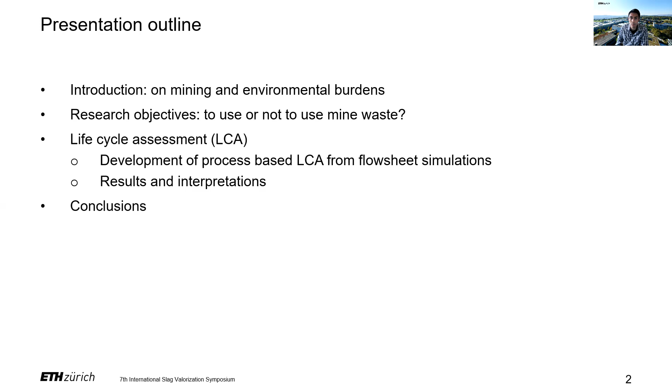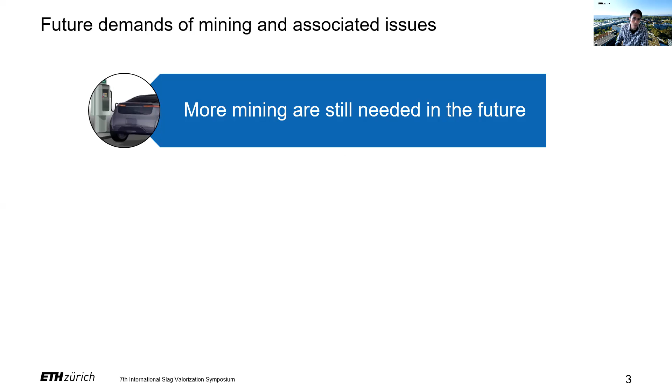So as much as we love renewable energies, EVs, electric vehicles, and also all other technologies for the low carbon transitions, we also need to understand that they have one thing in common, which is material and metal. So of course, we need to mine more of those materials from nature. But when we're processing this mining, we also produce at the same time waste.

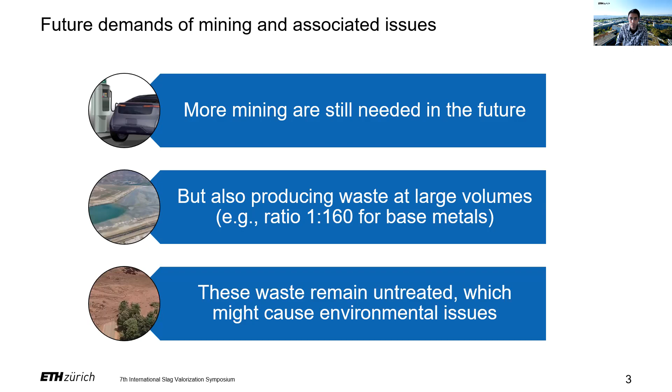So the ratio could be as high as 1 kilogram is equivalent to 160 kilograms of waste being landfilled. And if we are not careful in managing those wastes, we might face environmental issues in the future. Some researchers, such as Edraki et al., have suggested some ideas to decrease these environmental pollutions, such as desulfurization. So imagine that we are able to decrease the sulfur content, so there might be less acid mine drainage.

At the same time, there are also other propositions by Lottermosser He suggests that basically some of these residues also contain minerals that can be used for the production of construction materials. So we know that this is useful to decrease the mine waste volume as well as the opportunity to increase the economic value.

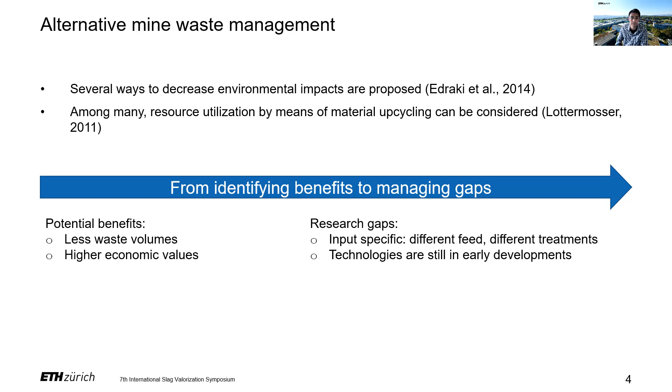But we also need to realize the challenges. For instance, these mine wastes have different characteristics, so there might be different recycling options. And most of the time, they are still developed in the lab. So we cannot just say they are viable or feasible. That's how we come up with the research question. So the most important thing would be, how can we determine whether this process is sustainable or not? How do we measure it?

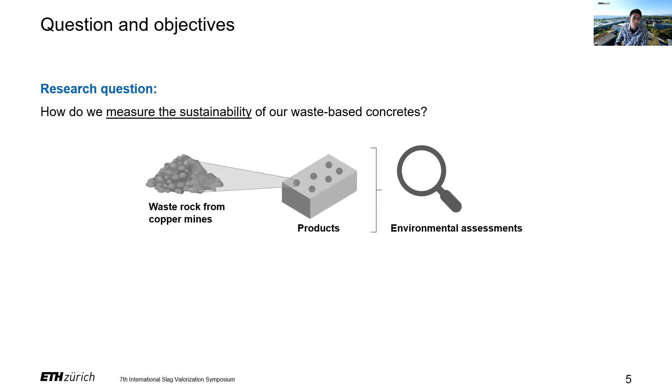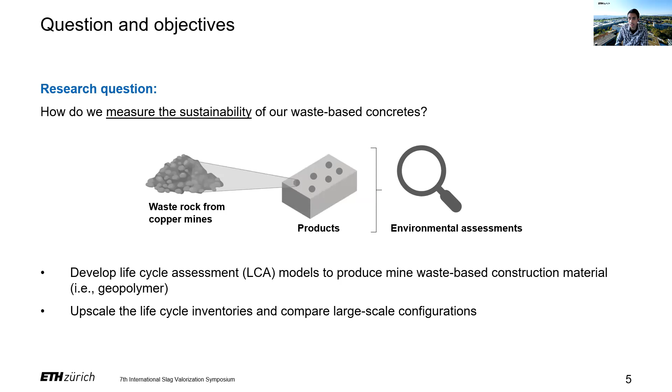So this is just an illustration. We obtained the waste rock sample from our partner from the copper mine sites, basically. And then the question is how we can conduct the environmental assessment. And the main principal method is called life cycle assessment. So we develop models for this life cycle assessment. I'll come back to that quickly later on. And at the same time, since we are dealing with new technologies, we have to think about how we can scale up these new processes.

For those of you who aren't very familiar with life cycle assessment, or LCA, it's actually a standardized method to measure or quantify all the input material flows, as well as the output flows to the environment. So we characterize them as emissions. So imagine at the beginning, we have the raw material or the mine waste, and then we do some treatments like heating, and then we introduce electricity, and then we also emit some wastewater in the entire value chain.

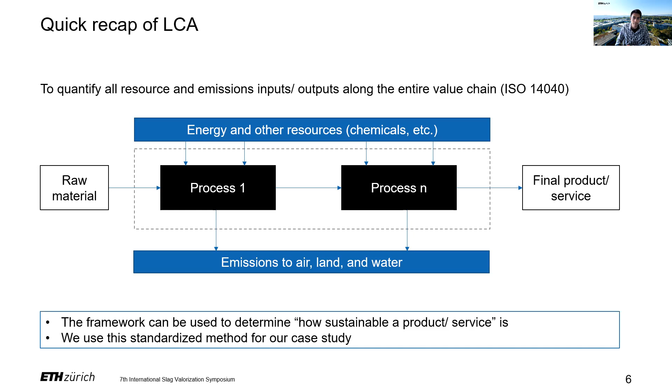So we need to know what kind of processes are involved and also what kind of inputs and outputs are discharged to the environment. So this is a method that can determine whether a product is sustainable or not. And this will be the main method that we use in our study.

Coming back to geopolymer. Davidovits extensively studied geopolymer materials for almost 2 or 3 decades. It's a synthesis of alkaline solution with aluminosilicate powder. So as long as we have these materials, we are able to produce geopolymer. In our case, we pick sodium hydroxide and sodium silicate as our alkaline solution or alkali activator solutions.

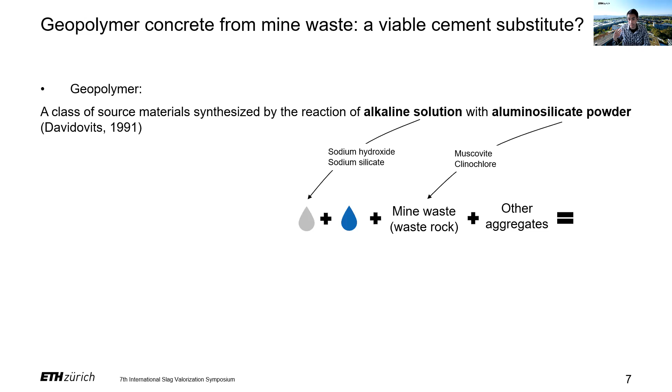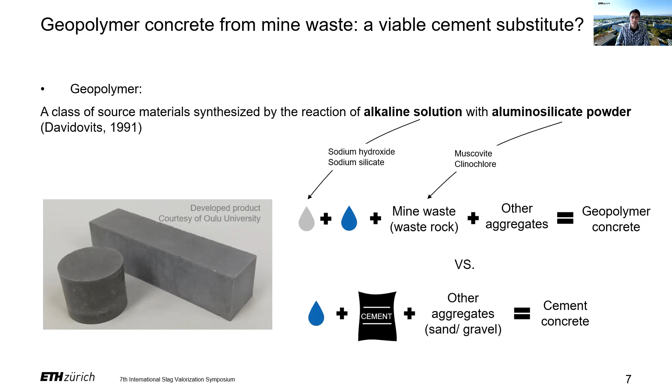We also obtain the mine waste rock, which already naturally contains muscovite and clinochlore, which are rich in silicate and also aluminum fractions. And we also need additional water as well as aggregates to strengthen our material to produce geopolymer concrete in the end. This is just an example that our counterpart has produced in their lab. And we eventually want to compare this with the ordinary Portland cement concrete, depicted here at the bottom.

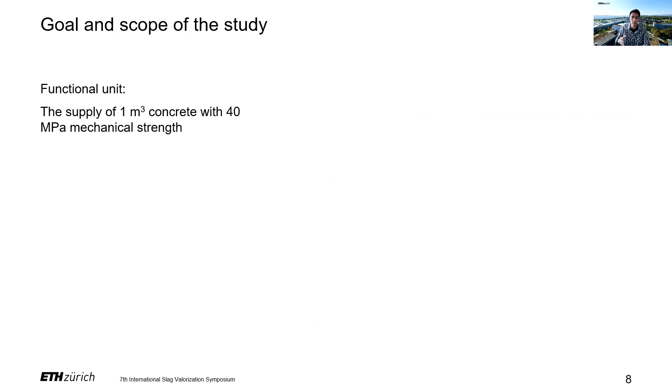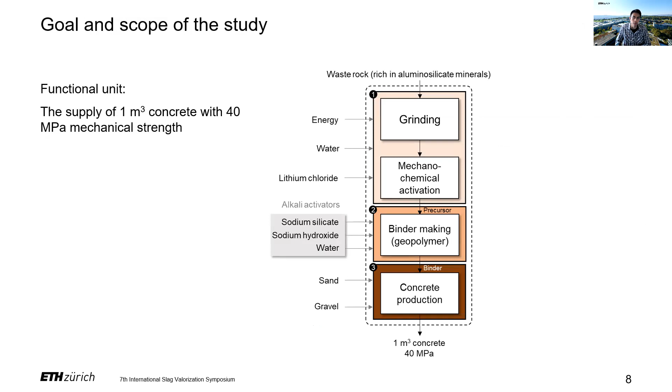We define our goal as the production of 1 cubic meter of concrete with the specified mechanical strength. This is very important in LCA because we want to compare equivalent systems. And based on our investigations, these will be the steps necessary to produce geopolymer concrete. These are also the foundation of our life cycle inventory data.

So we have the grinding in the form of disc milling at lab scale, and later on we add chemicals, and lastly we cure the concrete itself by casting it in this specific equipment, and then we produce concrete with a specific mechanical strength. We also rely on secondary data to fill the data gaps, for instance, from one of the most extensive recent review papers about geopolymer concrete.

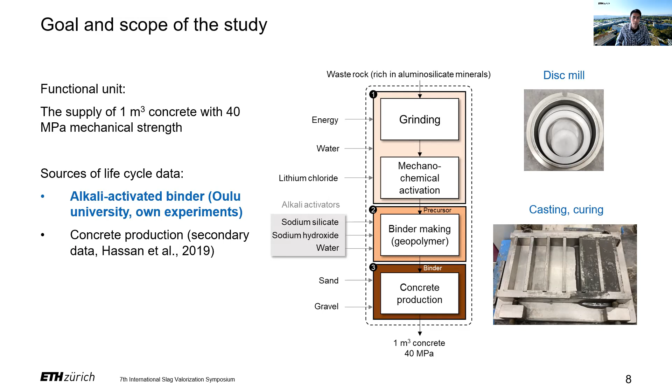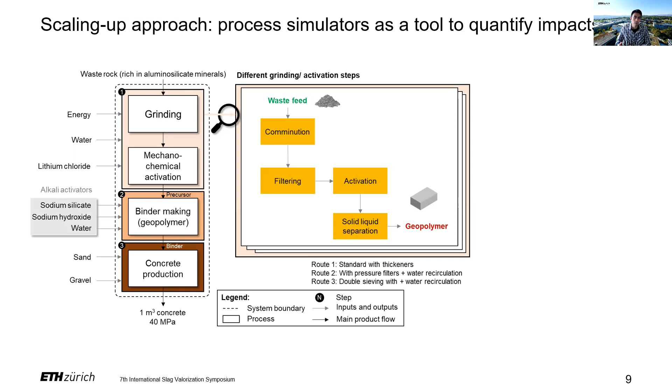However, when we are trying to scale up these processes, of course, they might behave differently. I mean, the equipment would entirely change. And even when we think about one simple step or lab protocol in our lab, it involves some complexity. That's why we need to understand how we involve these complexities in our modeling.

And one of the suggestions would be to develop life cycle assessment models using a process simulator or process modeling tool, such as those suggested by Reuter et al. So the main input data would be the feed characteristics, as well as the unit equipment process parameters that we define for each process or for each block, the yellow blocks shown here on the slide.

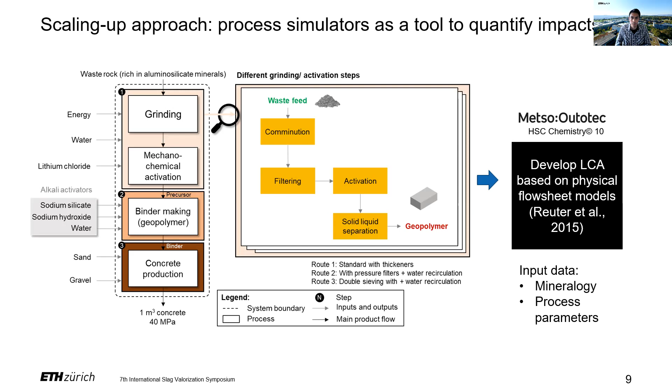I'll give you an overview of what kind of configurations are possible in the large scale for our geopolymer making. In the beginning, we have the waste rock feed here, and then we're trying to separate the inert materials from the non-activated materials. In here, we are trying to activate the materials using a high-intensity grinding mill. And lastly, we try to separate the wastewater or tails from the final products. Important to note here is the presence of thickener and mixer, because they are basically separating the products, as I said before.

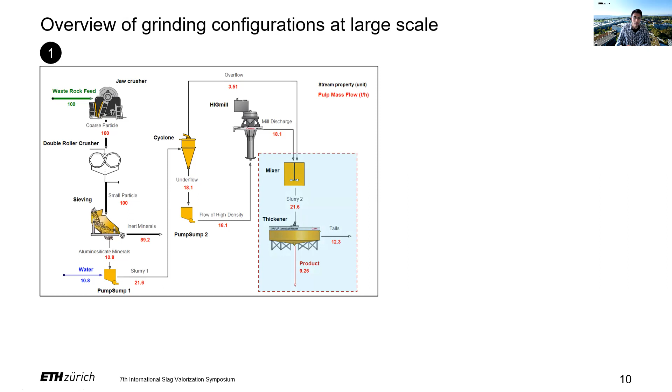In the second step, we are trying to think about how we can save water consumption. So instead of using a thickener, we are installing a pressure filter plus the equipment to separate the wastewater from the amount of water that we can recycle. By doing so, we are able to reduce the amount of freshwater intake in our process. But also, as a drawback, we need additional equipment or additional pumps. So that is associated with extra energy involved.

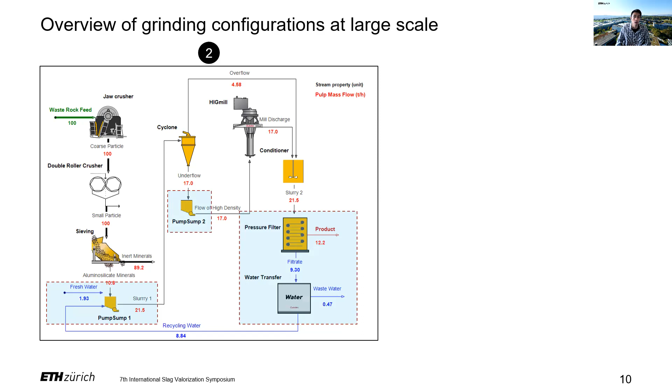We can actually optimize it even further, similar to the second process. Instead of using only one sieve, we can add an additional sieve, so that in addition to saving water, we can also decrease the effort to pump the entire materials. So we are still able to decrease the water consumption, and we are still able to produce the amount of product similar to the second method or second model.

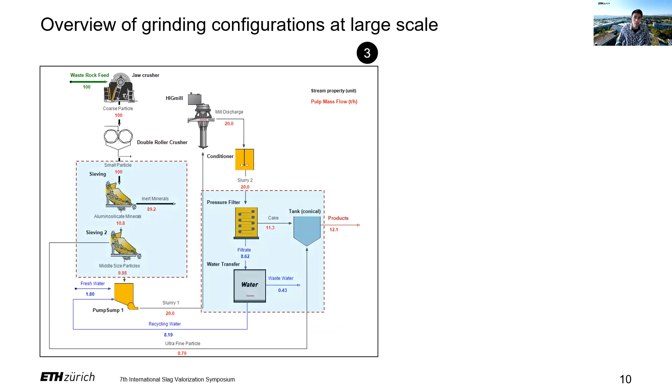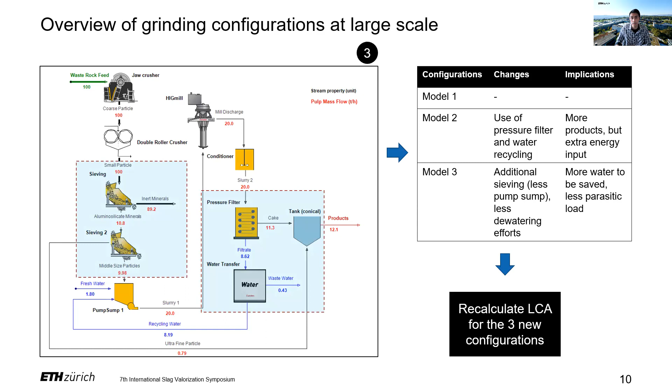So this will be the summary of changes and also the implications of changing the flow sheets in between models. And we resimulate the LCA for these large scale models, because eventually we will also compare this with a lab scale LCA. When we compare this with the lab scale LCA, we understand that in all these three large scale configurations, we are able to reduce energy consumption by up to 90% compared to the lab scale.

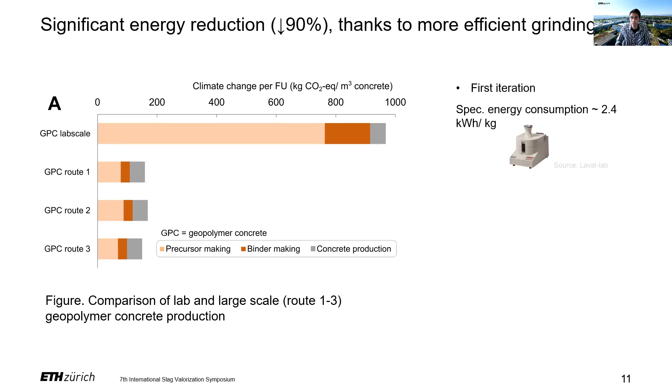This is thanks to the change of the equipment from a small scale pulverizer or milling equipment with 2.4 kilowatt hour per kilogram energy consumption to 0.02 until 0.03 kilowatt hour per kilogram material. So by installing this high intensity grinding mill equipment, which is already mature, already reaching its economies of scale, and which also has process synergies with the other unit processes, we are able to significantly decrease our energy consumption and eventually make geopolymer concrete production more competitive.

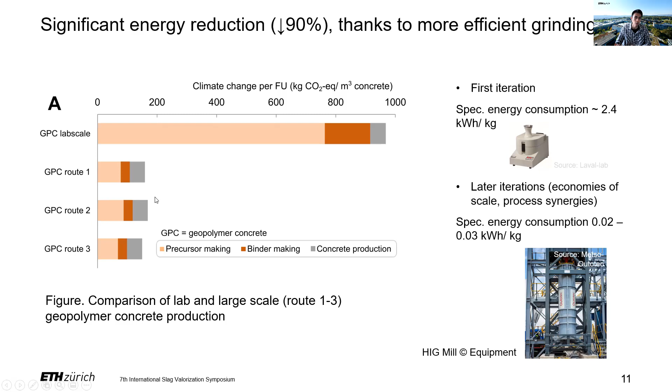This is thanks to the prevention of the high temperature clinkerization process, up to 1400 degrees Celsius, in traditional Portland cement concrete production. So we substitute this by not involving a high temperature process at all, replacing it entirely with the addition of alkali activating solutions.

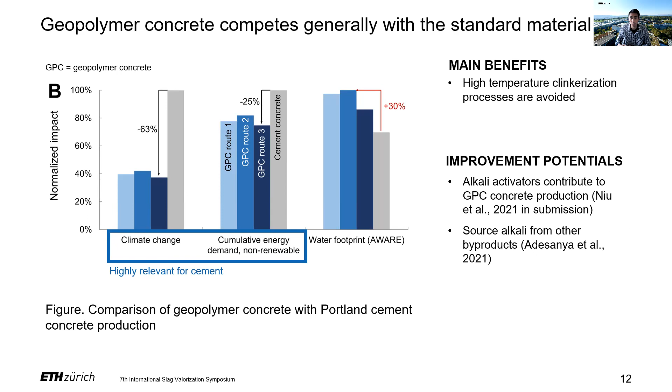However, we also need to understand that by doing LCA, we are not only assessing one or two impact categories, but there are also some environmental shifts or burdens to other impact categories. For instance, there might be an additional increase of 30% in water consumption in our case, despite being able to decrease water consumption with our different configurations. And some researchers have already suggested that we can decrease this even more by replacing the alkali activating solutions entirely or sourcing them from byproducts or underutilized waste.

In summary, this is what we can conclude from our research in terms of competitiveness in the market. Based on our investigations, geopolymer concrete can already compete at large scale, thanks to the process simulation plus the expert inputs in the LCA modeling. So it can already represent the prediction of large-scale industrial production in reality.

And lastly, about recommendations. First, we have to think about how we can reformulate our alkali activating solutions to have lower resource consumption impacts. And we also need to think about how we can extend the boundary. For instance, our study did not involve leaching tests, but in the future, one should also conduct leaching tests for the finished products to understand the downstream impacts when using or ultimately disposing of the materials.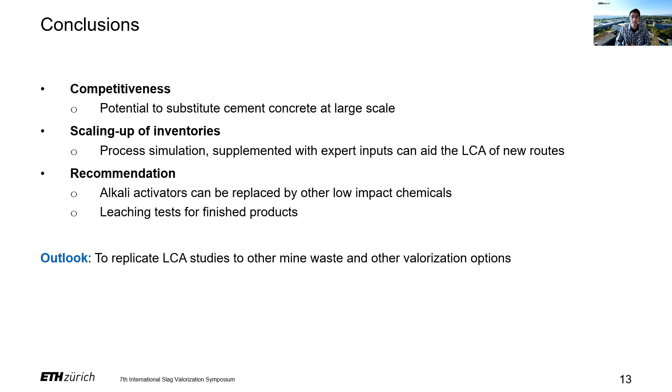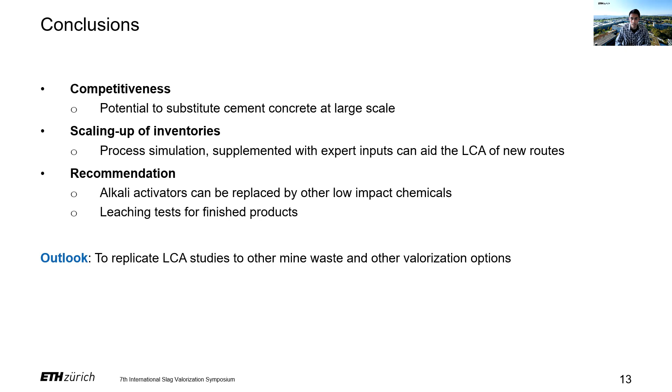As an outlook, this is just an example of one LCA for one specific mine waste type. But the idea is also to replicate these types of LCA studies for other mine waste, such as tailings, since there are many types of valorization or recycling options for mining waste. And that is all about our presentation.